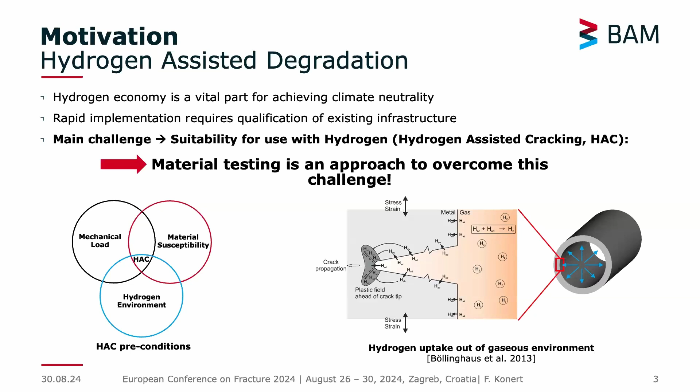We have a high market ramp-up of hydrogen applications, so many materials get into hydrogen service, and we have to gain knowledge of how they will perform. One approach is testing the materials to overcome this challenge. And as we heard during this whole week, there are several methods we can apply.

Every method has its pros and cons, so we can't say one is really the best. We also saw today some in situ electrochemical charging, which is quite easy to apply, and in the first place quite cheap.

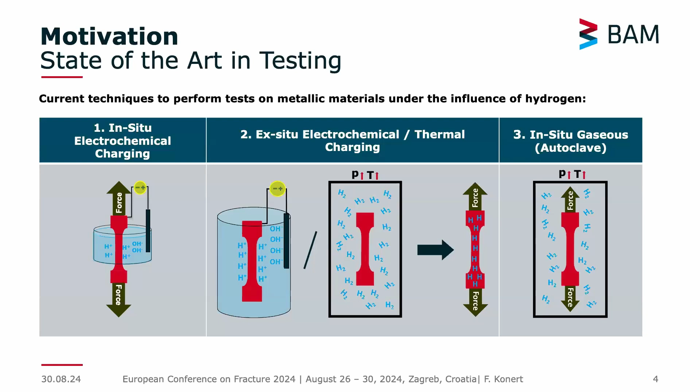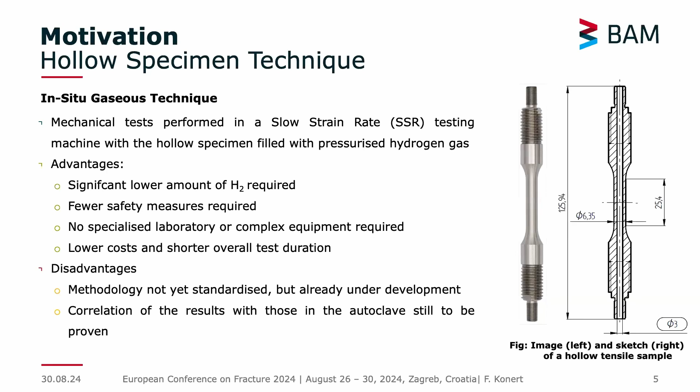Let's go back to the motivation for the hollow specimen. As we heard, there are a couple of advantages because we can combine in situ testing with a small amount of hydrogen, so there are not so many safety requirements in the lab. But there are also some drawbacks. It's not standardized yet, but there's ongoing work on that. And the correlation to full solid specimens is not yet really clarified.

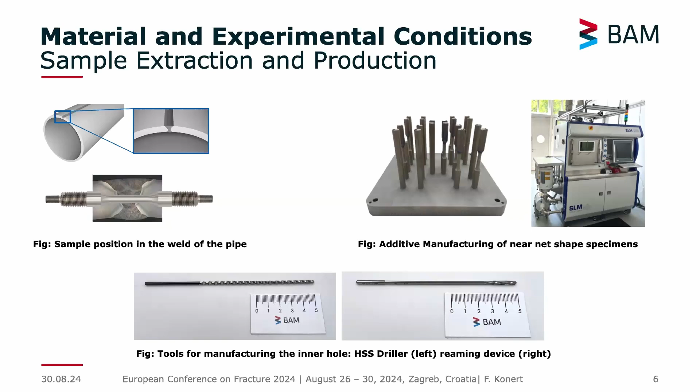The test setup was also shown by a couple of people already. We saw some differences, because we take the approach with a hollow sample where the hole goes through the entire specimen, so we can purge through the specimen to get a better quality of hydrogen inside. I guess a lot of people also saw the approach with only a blind hole. There should probably be some discussion about which is the better solution.

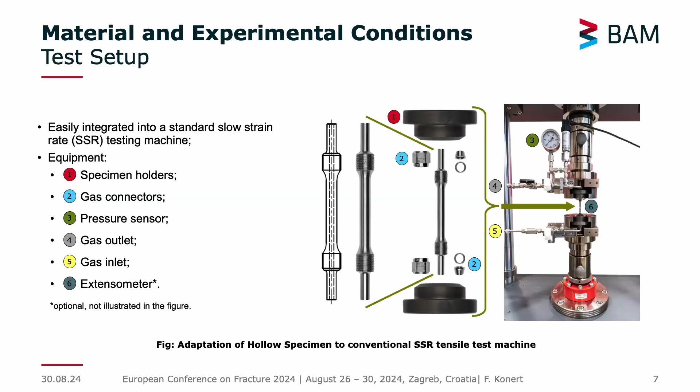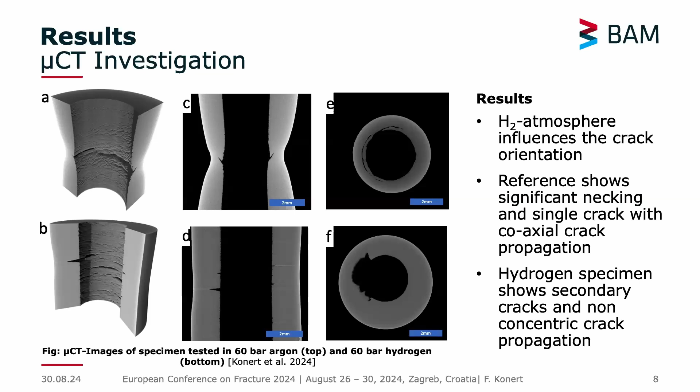And in contrast, in the hydrogen charged specimen, you have a different orientation. It's 90-degree oriented to the loading axis, and you also see that the crack does not really go concentric from the inner center of the hole. We see this for some materials, and I guess a lot of people also saw this at the presentation of Yannick yesterday, for this wire arc deposited specimen.

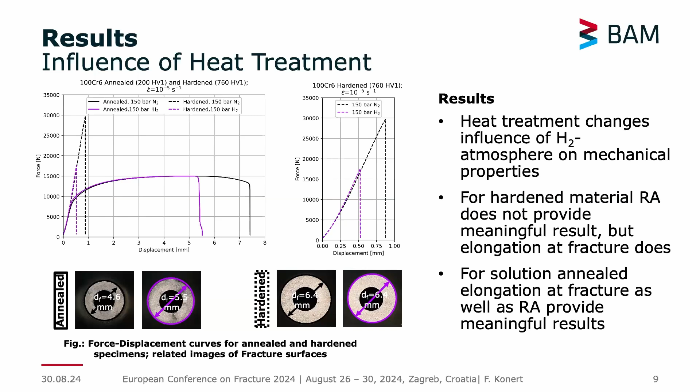So the point I want to make here is, it depends a bit on the material behavior in general how to interpret the results for the tensile tests. With that, I want to come to the most important point for manufacturing the specimen, because the state of the inner hole plays a crucial role for the hydrogen effect itself.

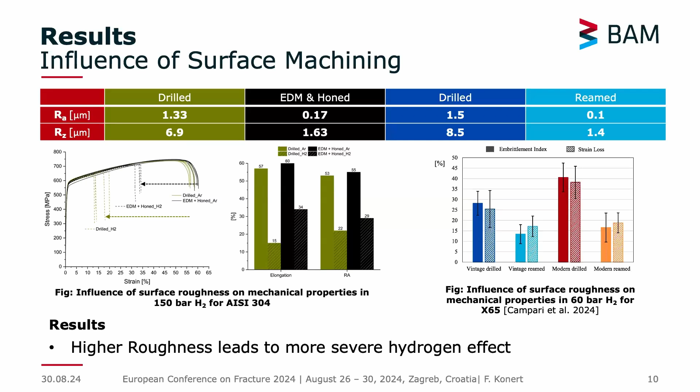And as you can see, there are quite big differences depending on how you produce a hole. So if you want to compare hollow specimens and results from hollow specimens, you want to keep an eye on this.

With this, I want to come to the additively manufactured specimens. On the one hand, as I said, we have specimens that were printed as cylindrical bars, and afterwards we produced the contour conventionally, and we also have specimens which are printed near net shape. So the red ones are printed near net shape, and the blue ones are the printed samples.

But then afterwards, the contour was machined in outer geometry. And as you can see in the force displacement diagram, and also in the SEM images, for the near net shape specimen you have got a slight decrease in the elongation at fracture for hydrogen, but it's not nearly as big as it is for the conventionally manufactured geometry of the additive manufactured specimen. But there's still a hydrogen effect present in both.

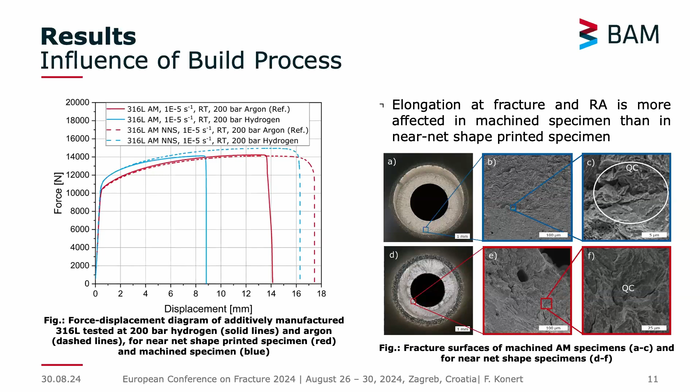So as you can see for these specimens, there are also quasi-cleavage areas in the fracture surface, as well as for the near net shape ones. And if you take a look at the surface roughnesses, the near net shape ones, of course, are way worse than the machined ones. So it's a bit of an opposite trend. If we just relate to the surface roughness, we would assume that the near net shape ones would perform worse in hydrogen.

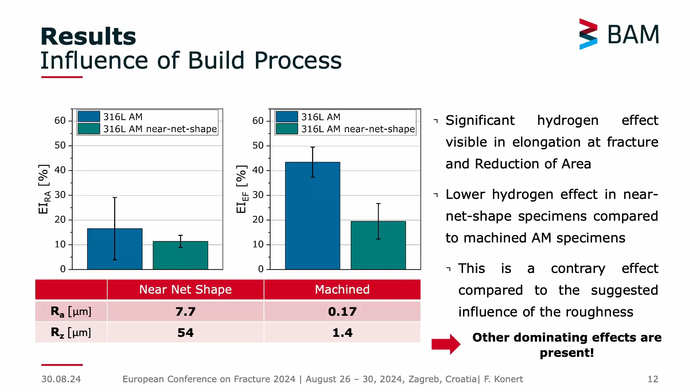But of course, out of the process of manufacturing of the material itself, so the laser powder bed fusion process, you have got some surface layers or another dominating effect which is present, but it's not yet clear whether that is time dependent or not. So we should go a little bit more in depth there, whether it is really an effect which is present over the whole lifetime of additive manufactured components, if you manufacture components in this way.

And with this, I also want to come now to the cross-weld specimen. So as you can see on the upper left, there's the specimen geometry in solid lines, across the whole weld metal, the heat affected zone, as well as the base metal, and as a reference, only the base metal in the dashed lines.

And if you compare them for the reference specimen in the black colored lines, you see that you already have a slight increase in strength, where you see more or less yielding in the force displacement curve, but you have got a similar qualitative effect when it gets to hydrogen. So you have also got a clear decrease in the elongation at fracture, both for the specimen in base metal as well as for the cross-weld specimen.

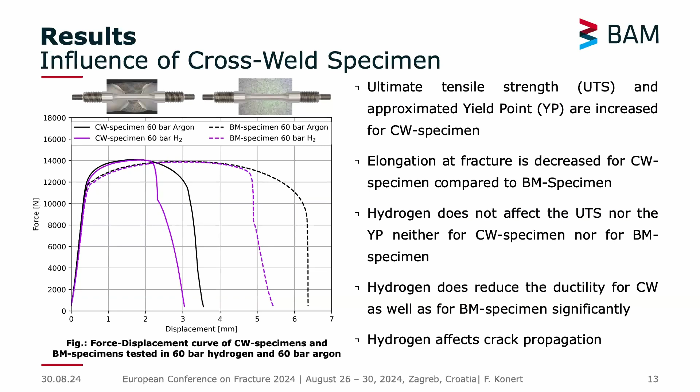And just to get a closer look at the location of the fracture, we performed these cross-cut images. On the top, you see the reference of the cross-weld specimen, and you also see in this cross-section image that you have a clear necking in the specimen, and also this 45-degree crack is present here, and the crack is just outside the weld metal. This is because we have a slight overmatch in the weld metal, but for hydrogen it's nearly the same.

So we also have the crack initiation outside of the weld, but we have some secondary cracks here, and also the orientation of the crack is slightly different. So these are more or less the results of the cross-weld specimen.

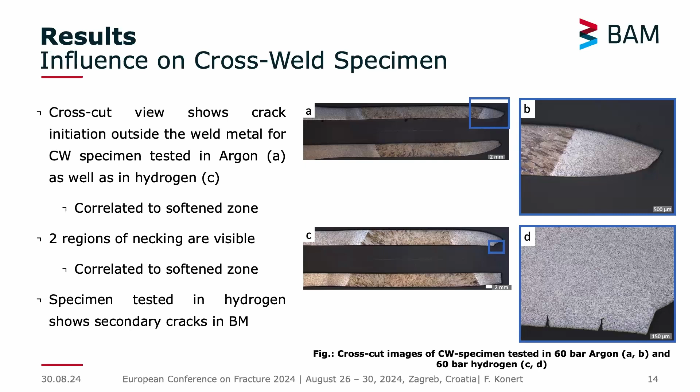So as conclusions, as you heard this week many times, in my opinion the hollow specimen technique provides an easy and affordable method to investigate the effect of hydrogen on the material properties in many metals, and the manufacturing process is really a crucial point you should keep an eye on. Layers due to additive manufacturing decrease the effect of hydrogen, at least for the test conditions we performed here.

And the reduction of area is affected for the cross-weld specimen we saw here, which is also related to the same microstructure where the crack happens. And the crack initiation in the weld specimen is not changed by the presence of hydrogen.